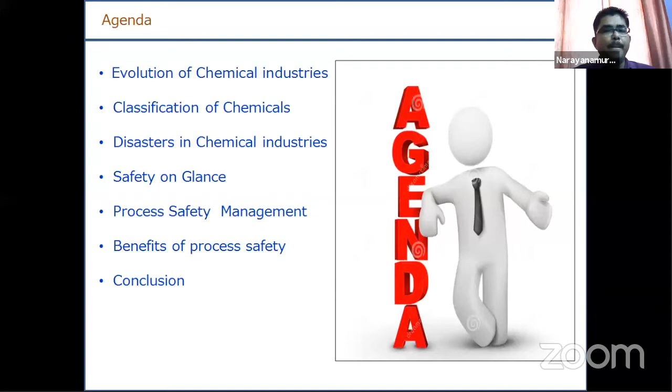So the evolution of chemical industry starts somewhere way behind 5000 BC, where the invention of fire played a very important role. Clay was used for making of utensils. In 3000 BC, Egyptian tombs were covered with soda ash, and we were able to ferment vinegars from grapes. In 1600 AD, inorganic chemicals were invented to preserve meat, and gunpowder was used in local artillery and warfare, and soap invention played a major role in 1600 AD.

In 1700 AD, 14 elements were identified. In 1800 AD, 100 elements were identified. 1850 to 1900 saw the evolution of organic chemicals and radioactivity, which played a very important role in generation of electricity as well as in warfare. In 1930, a new revolution started for the Second World War, where plastics and petroleum refining played a very important role. That also started the evolution of the polymer industry throughout the world.

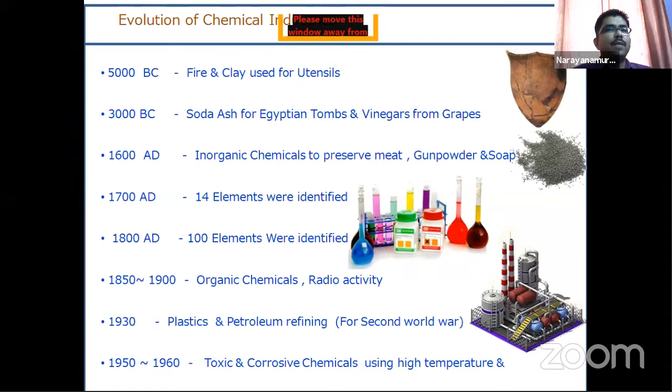In 1950 to 1960, various toxic and corrosive chemicals were invented using high temperatures and reactors. Thus started the industrial revolution throughout the world. So this is the basic evolution of how the chemical industry evolved from 5000 BC.

Based on the various reactivity of the chemicals, we have chemicals classified. 13 types of chemicals are classified based on the hazardous components. The first is flammables. Flammables are again classified into 3 types: class A, class B, class C, based on the flash points. Second is explosives, which are either air reactive or water reactive, or they are explosive because of the composition of various chemicals. Corrosives, based on pH, are acids and bases.

Toxics are basically those which create danger to environment and to humans based on exposure. Oxidizers are basically chemicals which react with oxygen and give out various toxic components. And we have compressed gases. Compressed gases are stored mainly in cylinders or in bullets. Next is cryogens, next is air reactive, and next is water reactive.

On the right hand side, you can see the various symbols of various chemicals. The square shape which is red indicates it is usually a danger. As we see in traffic signals, red means you stop. The same thing applies to chemicals, where the flammable symbol inside the red square indicates it is actually flammable. Oxidizing means you have the O symbol over which there is a flame. Explosive means it is like a cracker, so it's explosive.

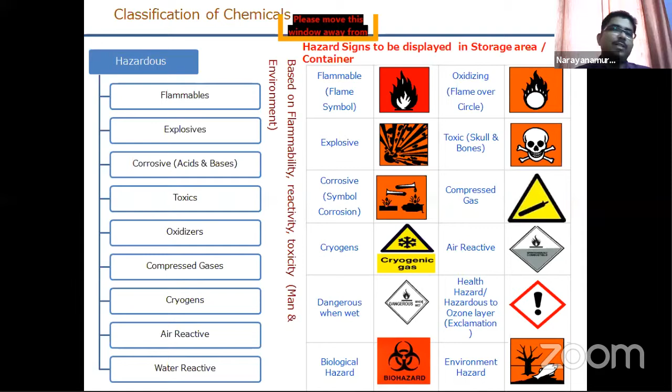As per government rules, the classification of chemicals needs to be displayed on the can, the bag or the container where it is stored. Environmental hazard is shown by a fish coming out of water. So these are the various classifications of chemicals in the world. Based on the reactivity, the chemical composition, and the constituents of the chemical, they are further classified into various elements.

So these have been the major chemical disasters throughout the world. It is a BASF explosion. BASF is a factory which manufactures various chemicals for fertilizers as well as for artillery. It happened in September 1921, where 4,500 tons of ammonium nitrate and ammonium sulfate exploded.

In theory, in 1919, there was a common saying that both the ammonium nitrate and sulfate concentrations had to be maintained at 50-50% to make sure that the reactivity does not explode. But the concentration of ammonium nitrate exceeded 60%, which resulted in a major explosion. Almost 80% of homes were destroyed over a radius of 25 kilometers. This was the major industry before World War I.

In 1947, when there was a boom in the petroleum industry and in the fertilizer industry, there was an explosion on a French ship. During the unloading of ammonium nitrate, people started using iron tools instead of non-flammable tools, which resulted in the explosion of ammonium nitrate. At that time, fire extinguishing was not well known. The captain used steam to extinguish the fire. The fire got aggravated; 3,500 people were injured and 576 people were killed. This resulted in the implementation of safety measures in dockyards.

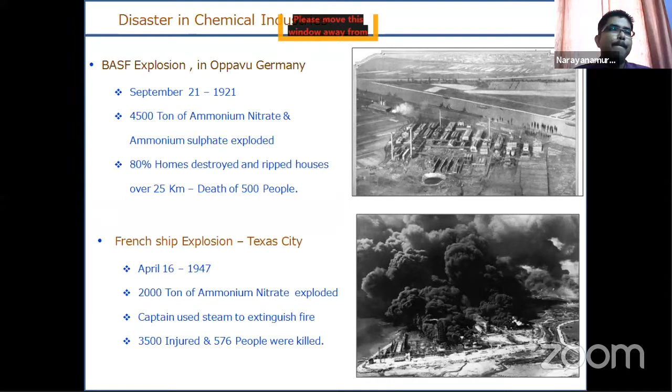As you all know, the gas leak. India was at the fertilizer revolution, the agriculture revolution. We needed to manufacture a lot of fertilizers to meet the demand of the food industry in India. Manure was being produced in Bhopal, and 42 tons of methyl isocyanate was released, which resulted in 18,000 people dead and over 5 lakh people affected. Till now, there is a case going on to give remedy to the people.

The gas leak in Bhopal created a major change in the government, and after this, the occupier was held responsible. The occupier is accountable for any hazardous leak in India. Before that, for any hazardous leaks or accidents, the occupier could not be held legally responsible in law. After the gas leak in Bhopal, a special clause, 41D, was introduced in the Factories Act to make sure that the occupier is held responsible for gas leaks and any hazardous occurrences.

This was a major one in Seveso, Italy. The toxic cloud release of tetrachlorodibenzodioxin, a very dangerous chemical. People didn't know about the use of this chemical. The reactor overheated and burst. The toxic cloud was released, and till now this land has become uncultivable. 1,800 hectares of land became uncultivable. Till now, people have isolated the area.

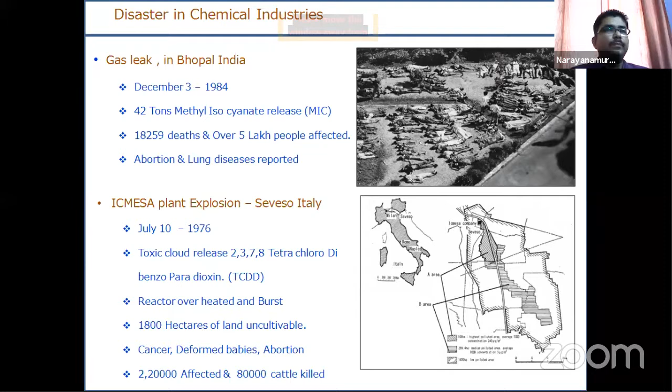This is March 23, 2005, where there was a hydrocarbon vapor explosion in the British Petroleum BP Texas City refinery. Almost 15 deaths were reported. British Petroleum is basically a UK company, and it was forced to sell to the US for $2.5 billion. It is actually 1/10 of the profit of the company. They sold it for a meager amount.

This is a major one. China was competing in the world to become a superpower, so all major chemical industries were opened in China. They wanted to compete with the USSR and the US, so they started petroleum refining. At that time this incident happened in Jilin Petrochemical Corporation. Jilin is a major producer of both petrol and diesel supplied to China.

The nitrobenzene rectification tower exploded. 100 tons of benzene and nitrobenzene flowed into the Songhua River. The Songhua River is the water source for almost 5 provinces in China. The water pollution results in blood cancer, and 1 lakh people were evacuated from this place. Till now, this place is not being used because of the fear of chemical pollution.

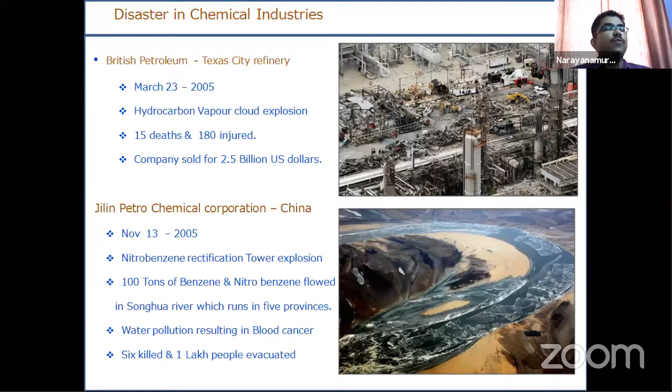And as you all know, at LG Polymers in 2020, the toxic release of styrene happened. 2,800 tons of styrene was released into the atmosphere. 13 deaths and 1,000 people were affected. The company was closed temporarily.

What is the cause? The temperature. Styrene was stored in a storage tank, and 22 degrees was to be maintained in the tank. Due to COVID lockdown... we need to prevent the polymerization of styrene. So tertiary butyl catechol needs to be added to the tank to stop the polymerization of the styrene, but that was not added. Due to the lockdown, as it was summer in Visakhapatnam, the temperature was not maintained.

The chiller plant was switched off for almost 24 to 48 hours to reduce power consumption in the plant. So slowly, the vapor in the tank started expanding, and an emergency procedure was not available.

The plant was started in 1998. At that time, population was not allowed in the 14-kilometer range. But as the population slowly increased, people started moving towards the company. Municipal authorities also gave permission for people to locate their homes near the factories within a 3-kilometer radius.

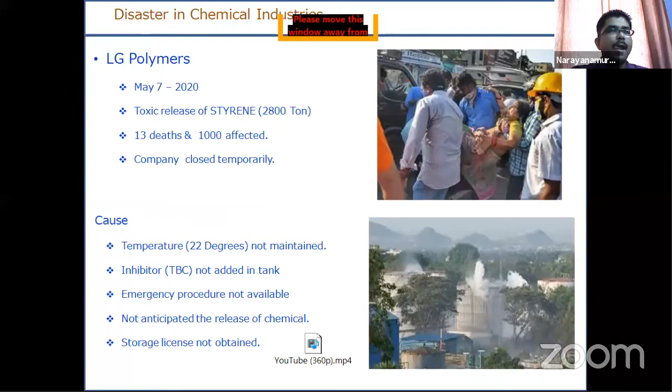What is the near miss? The near miss is nothing but when there is no injury occurring, no illness or fatality occurs. It is called a near miss. The incident may occur, but there is no injury, illness, or fatality. So that is usually called a near miss. Then you need to write it down.

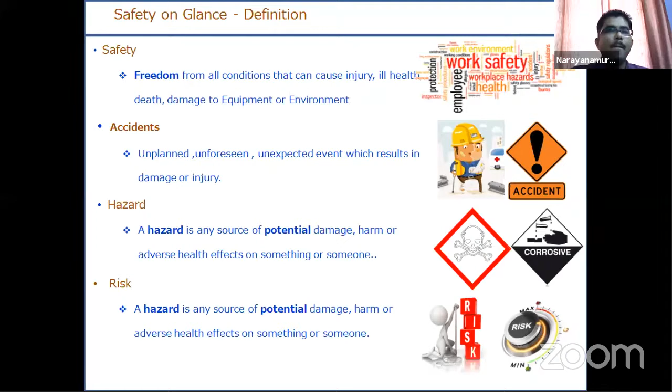So an unsafe condition can be a slippery road, can be steps without a handrail, can be a workplace environment where there is a physical condition which is causing an injury. Unsafe acts, I will come to on the next slide. An unsafe act is any act that deviates from safety procedure, behavioral issues, unauthorized work, etc.

As you see in the diagram here, there is a load attached to the hook of the crane. The chain link is cut. Okay, it is an unsafe condition. You have got two people working under a suspended load. No people should walk under a suspended load. We have got two people who are not aware of the load on top of them, so they are walking under the load. It is an unsafe act.

This is a near miss. The link is getting cut. The load is falling in front of them, but the people are not getting affected. This is an example of a near miss. Suppose the load falls on a person, there is an accident. Now you can understand the difference between an unsafe condition, an unsafe act, a near miss and an accident. The simple diagram shows you the four different aspects of an accident.

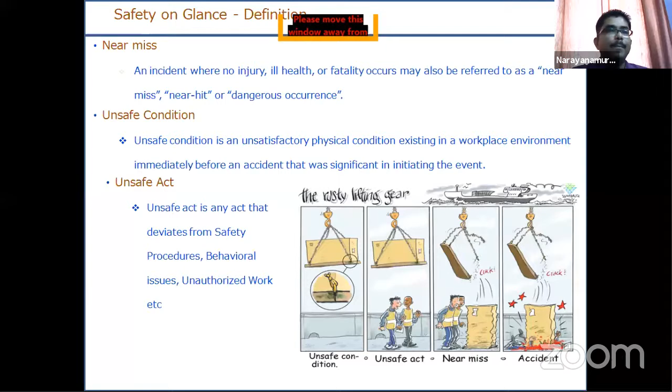So Heinrich is actually a safety scientist. To be frank, he has written various theories on safety, but I am going to give only a synopsis of what he has told. It is actually a 500-page book where he has told about various human behaviors, constitutive factors, and the physical environment which plays a very important role that affects human safety, which in turn affects the safety of the environment, health and society as such.

But according to the synopsis of his theory, 92% of accidents are mainly due to the unsafe acts of people. That is, it may be a person or a group of people. According to him, if 100 accidents happen throughout the world, 92% are due to the unsafe acts of human beings. 6% of accidents are due to unsafe conditions. Unsafe conditions may be a slippery floor, a damaged road, a damaged tunnel, a hanging wire, everything.

2% of accidents are due to natural disasters. Now, natural disasters are divided into two types: man-made and nature-made. We don't want to go into the political and economic aspects of natural disasters. There are various natural disasters happening throughout the world. People do it and they put the fault on nature. Okay. So, according to Heinrich's theory, 92% of accidents are mainly due to the unsafe acts of people.

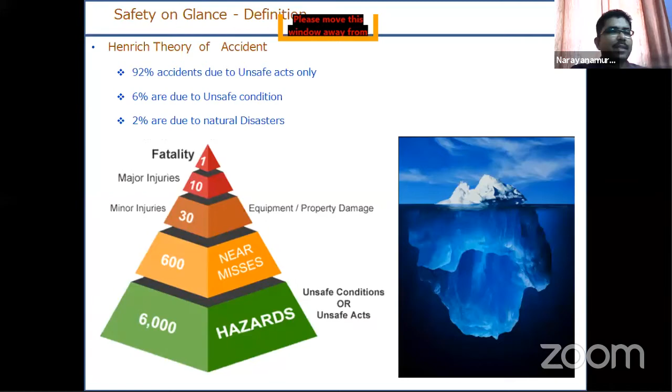So, why we have got the various hazards and various near misses, and why we need this process safety management. The process safety management mainly deals with four aspects called plan, do, check, act. Anywhere you go, process safety management concentrates only on four aspects, that is plan, do, check, act. The plan is basically based on assess and define what are the various hazards in the workplace. Then we have to design, implement and construct the controls over it. Then we have to monitor the process.

In the case of LG Polymers, they had an assess and define problem, that is, the styrene needs to be maintained at 22 degrees centigrade. They had implemented the refrigeration system inside the plant to make sure that the styrene is maintained at 22 degrees centigrade. But the operational maintenance of the plant was faulty. That is, the cooling system was switched off, so the styrene temperature could not be maintained at 22 degrees centigrade, which resulted in the death of 13 people and affected 1000 people.

So, process safety management is a continuous process. You have to maintain the process. Suppose you see any flaw in the process or any improvement in the process or any change in the process, we need to again assess and define the process. Then we need to implement controls. Then we need to monitor the same. And then this process goes on like a cycle. So this process needs to be done in each and every stage of the process safety management. I am giving you just the outline. Based on this outline, you can develop; I will give you examples of how the process goes.

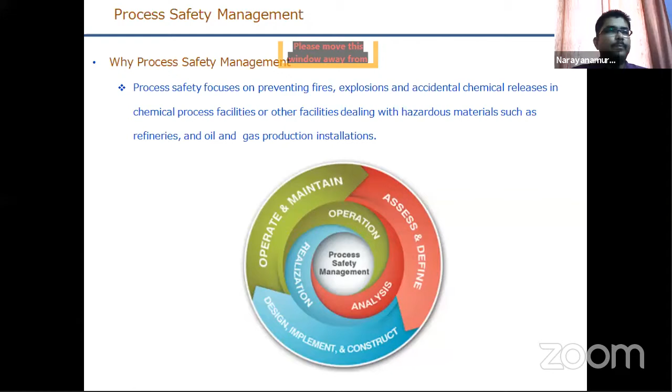So in the process safety management, we need the following information. Without this information, we can't proceed with the process safety management. What is the process safety management content? Process safety information. For this process safety information, we need the PSI diagram and MSDS. MSDS is nothing but the material safety data sheet of each and every chemical involved in the process. Then we need a process hazard analysis, it's called HAZOP. It's a beautiful study. It is being implemented in various petrochemical and any chemical industry should follow this HAZOP system to make sure that the process is safe. I will explain an outline of the HAZOP process in the coming slides.

Then we need to know about the standard operating procedures. These two stages come under planning. This stage comes under do. Then we need to train the people to follow the safety procedures. Okay. Then we need to have the permit to work system for the various processes and various activities involved in the process management. Then we need to have the emergency response system.

In the case of styrene leakage, I will talk about the present scenario. The company did not conduct. We need to have an on-site emergency and off-site emergency plan in case of toxic release. On-site emergency talks about any hazard or any fire or any explosion or any toxic release occurring inside the plant. Off-site emergency is outside the plant. If any toxic release happens, how the person is going to get affected, how you are going to evacuate the whole people, what is the first aid method you are going to give, where is the nearest hospital available, what is the mode of transportation to reach the people, whether the hospital has got adequate antidote to cure the toxic release. All these need to be covered under the off-site emergency plan.

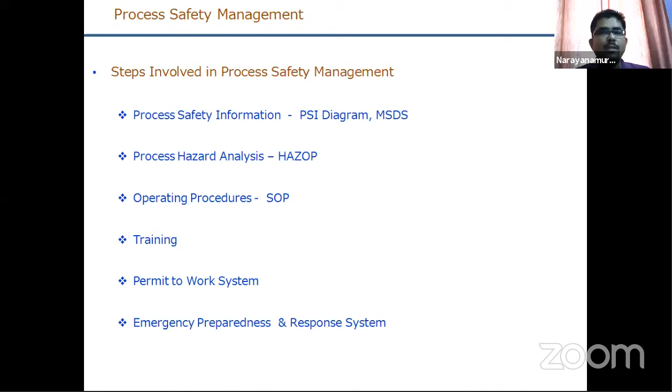You need to conduct a mock drill. Mock drill is a simple process where you do a scenario of a leak and how you are going to evacuate people to a safer location. Any loss can be compensated, but human loss cannot be compensated. It can never be replaced.

So the process safety management usually details the various hazards available in the process. I will show you an example in the coming slides. So what are all the various details required in case of process safety? First, we should know about the material safety data sheets of the various chemicals used in the process. This is mandatory. Styrene: I should know what the composition of styrene is. I will come to the material safety data sheets, what all should be there in them.

Next we should have the process flow block diagram. Next we should understand the process chemistry. What is the temperature to be maintained? What is the pressure to be maintained? What are the reactor parameters to be maintained? What is the maximum inventory of chemical I need to store? Because in case of a lockdown or a shutdown, we need not store so many chemicals inside our plant.

As the COVID lockdown was unprecedented, they stored almost 4,800 tons of styrene, which is highly flammable, out of which 2,800 got released into the atmosphere. So how much inventory I need to maintain for my production capacity also needs to be meticulously calculated. What are the safe upper and lower limits of temperature, flow control, pressure, and reactor conditions?

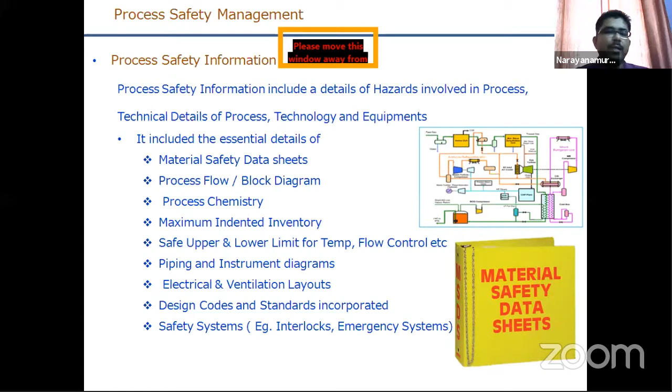Okay. Next, the material safety data sheet is very, very important. For every chemical, we need to have the 16 parameters. Without the 16 parameters, the material safety data sheet does not comply. So if you are purchasing a chemical from a supplier or anybody, we need to have the 16 parameters, and we should understand the significance of each. Only then can we decide the process parameters, the emergency response team, and the various emergency requirements of the plant.

So first is, who is the supplier, and the emergency contact number. What is the composition of chemicals? Then what is the hazard identification? What are the first aid measures to be taken in case of a toxic leak? With this I need to educate the people working inside the plant and also those outside the plant. Then what firefighting measures are required in case of any fire?

What are the handling and storage precautions? How should I store the chemical? What conditions are to be maintained? How much volume should I store? What is the requirement of the tank, of the chemical composition, of temperature, of pressure in the tank? All these things need to be available. What PPE is to be used? What are the physical and chemical properties?

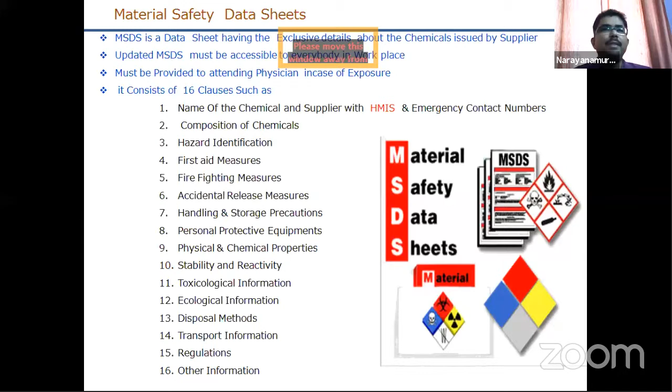So this is the hazardous material identification system. For all chemicals, there is an international standard which says that the fire hazard is usually denoted by this symbol with the red shading. The health hazard is purple or blue in color. If you need to specify any other hazard, in the others column we have got acid, alkali, corrosive, oxidizer, radioactive, no water. Then reactivity: may detonate, shock or heat may detonate, violent chemical change, unstable if heated, stable.

So if a chemical is labeled as 1, this is 4, this purple or blue, and this is acid. So I should presume that the flash point of the chemical is below 73 degrees Fahrenheit. Reactivity is unstable when heated. Health hazard is hazardous, so it will not cause any death during exposure.

Next is acid. So we need to understand, in the HMIS symbol, hazardous material identification symbol, if the number is more, then the chemical hazard is more. Simple. So before procurement of any chemical, you should know the various numbers. One is the health hazard, second is the fire hazard, third is any other specific hazard, fourth is the reactivity. These 4 must be known and must be labeled in this symbol on any chemical. That's what the rule says. But in India, almost 60% of the companies don't follow this rule, and we need to improve on this.

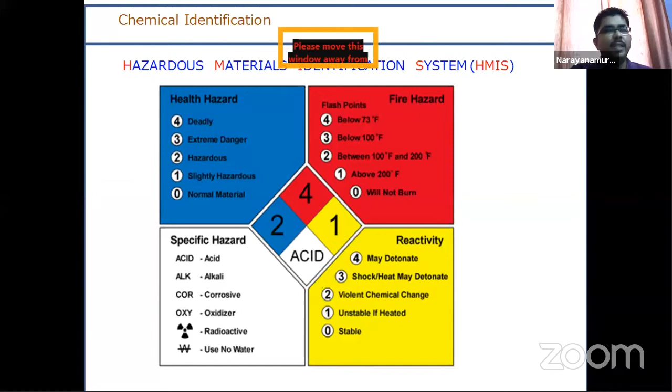So these are the various definitions which are given in the material safety data sheet. The material safety data sheet does not explain all this. It just mentions what TLV should be maintained, what PEL should be maintained, what is LD50. The material safety data sheet gives the various information regarding the various chemicals.

Then flammable. So for flammable, we have got three classes A, B, and C. Flammable is easily ignited below the flash point of 95 degrees Fahrenheit. The flash point is the lowest temperature at which a liquid produces vapor to ignite. For example, petrol is left in the open atmosphere. Petrol slowly evaporates. So for fire we need oxygen, heat as well as fuel. Fuel is available, heat is already available in the atmosphere. So petrol searches for a source for igniting.

So during this, suppose it finds any other source. For example, there is a matchstick nearby. There is a loose electrical connection nearby. There is a storage of hazardous chemicals that is not grounded properly. So through that fire may occur. So we should know at what temperature the liquid vaporizes in order to ignite.

So toxic is mainly substances able to cause harm on exposure. Exposure can be due to inhalation through the nose, and one is through the mouth, where toxic intake can happen, and one is through the skin. So these are the three possible ways a person can be exposed. So as you know, coronavirus is toxic to human beings. So what are you doing? You are covering your nose and mouth with a mask.

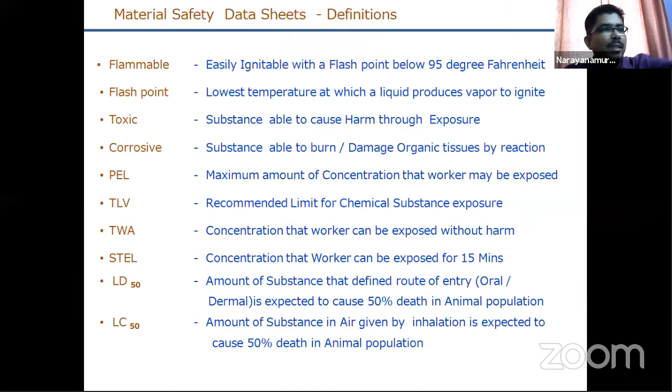So LD50 and LC50 are mainly meant for exposure in case of any environmental hazard. That is mentioned in the MSDS. So we have to make sure that LC50 and LD50 are within the limits of chemical exposure. So these are the various terms used in the material safety data sheet. Based on the material safety data sheet, we need to design the process.

So this is a process hazard analysis, where it mainly describes, as you said, plan-do-check-act. We should identify the various hazards involved in the process, and we should implement the various control methods to control the process. And the PHA analyzes the consequences of fires, explosions, and release of toxic materials, and it also determines the various failure modes where the environment or people can be affected or fire can happen. So the failure mode needs to be analyzed with an engineering control.

So the PHA team should always include engineers, operators, supervisors, and workers who have got direct experience, and they should have knowledge of codes and specifications of various chemicals and the various piping and instrumentation being used in the plant.

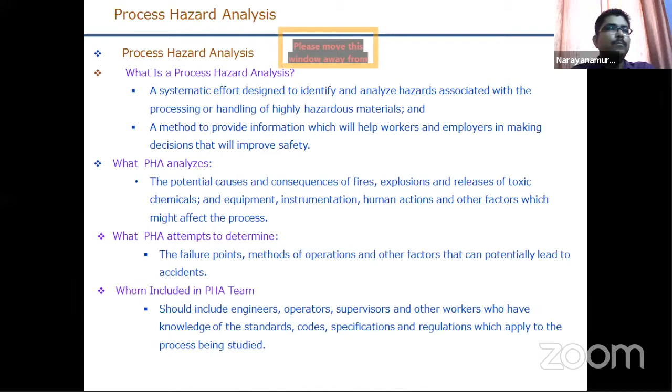See, there are various methods to do a process hazard analysis. One is a checklist. A checklist is nothing but a sheet which contains what all is to be seen in a process. Here is an example of a simple checklist. For example, before cooking, what are the things we need to maintain? That is a checklist. I need to keep the gas ready in good condition. I need to turn on the knob. I need to switch on the lighter. I need to keep the pan ready, the oil ready, the vegetables ready. So there is a checklist.

So based on the process or the requirement, we tick whatever is defined in the checklist. There can be a chance of failing the checklist because the checklist mainly depends on the experience of the person, not on the experience of the process. So there is also another method called the what-if method. What-if mainly concentrates on the end product, basically.

Suppose: what if I don't switch on the gas burner? What if I don't switch on the lighter? What if I don't keep the pan ready? What if I don't keep the material ready? So what will happen if we don't keep all the process parameters in ready condition? What are the various failures which can happen due to this condition? So all these things come under the what-if method.

The what-if method is mainly used in accident investigation or in problem-solving techniques, not in hazard analysis and process safety management. So HAZOP is called hazard and operability study. HAZOP study plays a very important role in process safety management. The HAZOP study is done in various process industries. It is actually a session of one week. I am only giving a glimpse of what is there in the process safety HAZOP study analysis. The simple requirements of HAZOP, I will let you know.

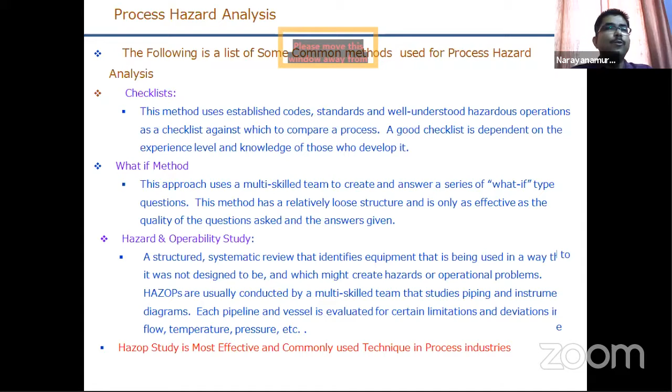Okay. So there should be a team from the top management, and the requirements of a hazard and operability study are: one, you should have the block flow diagram. I will show you what the block flow diagram is. Then you should have the process flow diagram. The process flow diagram is required for any HAZOP study. And next is the P&ID, piping and instrumentation diagram.

And next is the various codes and standards. Codes may be a regulatory requirement; standards and specifications are recommended practices for construction, fabrication, manufacturing, and inspection. So all these things, construction, fabrication, manufacturing, and inspection, need to be implemented during this HAZOP stage.

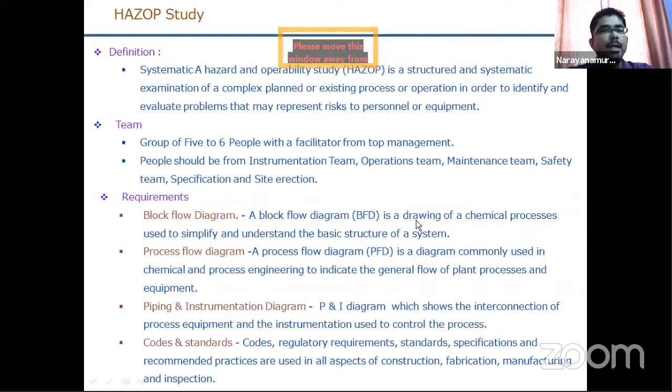Okay, a block flow diagram. I'll just show you the basic structure of a system. This is a block flow diagram. This is an example of an effluent treatment plant. So this is a block flow diagram. It is the effluent treatment process of a treatment plant, actually.

Sir, can I continue? Sir, continue, sir. So some people have raised hands, that's what I'm saying.

Okay, this block flow diagram mainly concerns the various process flows. It indicates the various stages the effluent water runs through in sequence. For example, effluent water passes through the screening process, the equalization process, the coagulation process, the flocculation process, and the tube settler. The bottom of the tube settler goes to the pit.

Then it goes to biological reactor 1, then biological reactor 2, then the tube settler, then the collector tank. From the tube settler bottom it again goes to the pit. From the pit, overflow goes to a clarifier and then to the dewatering plant. From the collector tank it goes to ACF, activated carbon filtration, then to sand filtration, and then the water comes out. There are two stages in the whole process.

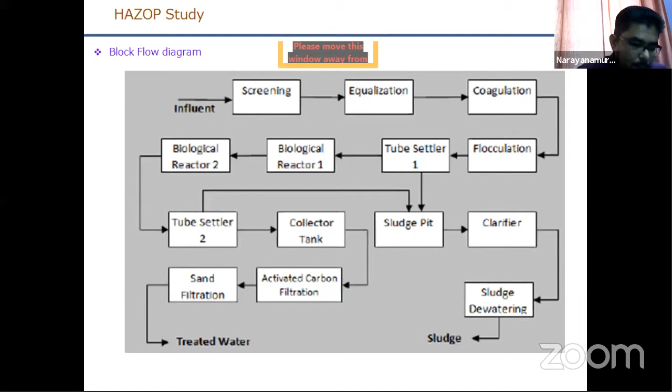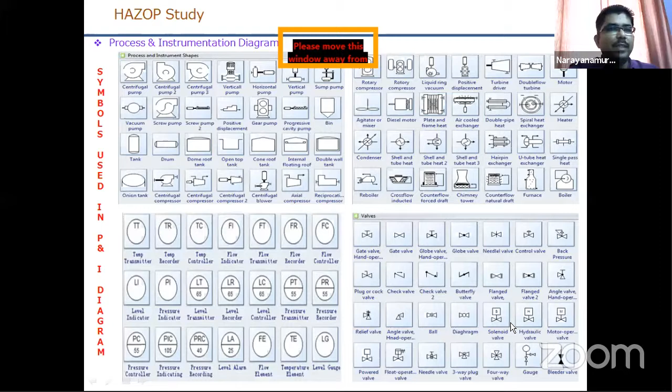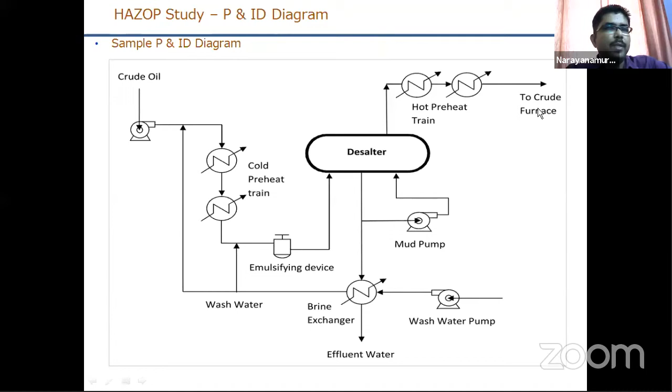I will explain with a simple example how to do hazard analysis. This is the reaction tank where we produce a product called C. We require two raw materials: material A and material B. It's a simple reaction, A plus B equals C.

The process requirement is that component B must not exceed component A, to avoid explosion. Component A should always be on the higher side; the quantity of A should be more than B to avoid explosion. This is the simple process requirement.

So what does the process hazard analysis say? What should a chemical engineer do? He should consider the various ways A can fail to maintain minimal flow, the conditions that may cause failure of the minimal flow of A. If B exceeds A, it may result in explosion. So what are the various causes which inhibit the flow of A?

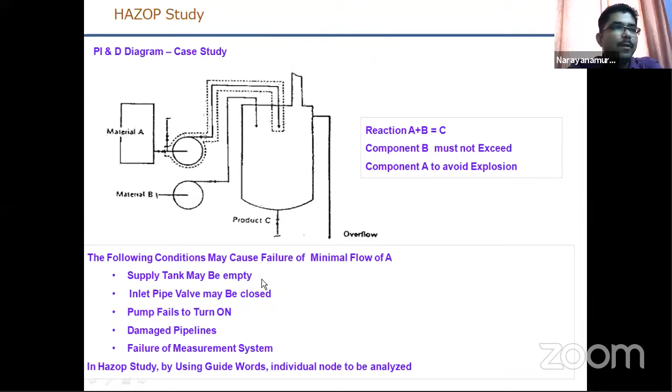So what we do, I follow a check sheet. So these are the various guide words used in the HAZOP check sheet. These are the various parameters. One is flow, one is pressure, one is temperature, one is level, one is time, one is agitation, one is reaction, one is startup shutdown, one is draining and venting. So these are the various guide words which are used in the process.

And each guide word should be followed by what happens if the flow is more, what happens if the flow is less, what happens when there is no flow, what happens when there is a reverse flow from the reactor, what happens when more flow occurs, that is as well as when both the components react together, I produce a component C. What happens when there is a deviation in concentration?

What happens when the concentration exceeds? What is the other byproduct produced? What is the contamination produced? What is the other component produced if there is any deviation in the process? So all these guide words are done for each and every line, each and every parameter. Suppose in this previous case, only flow is the guide word. So I have to apply this flow in all these 5 cases.

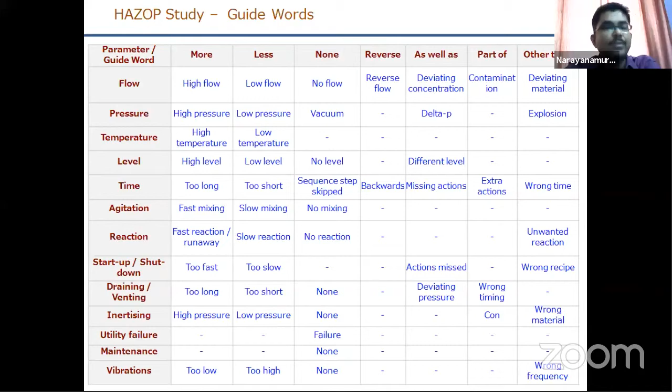Then I need to put it in a sheet. Guide word: what will happen with more? If there is more flow of A, what is the cause of this deviation? What will happen if the flow is less? What are the consequences? What is the hazard? So how do I implement this control measure?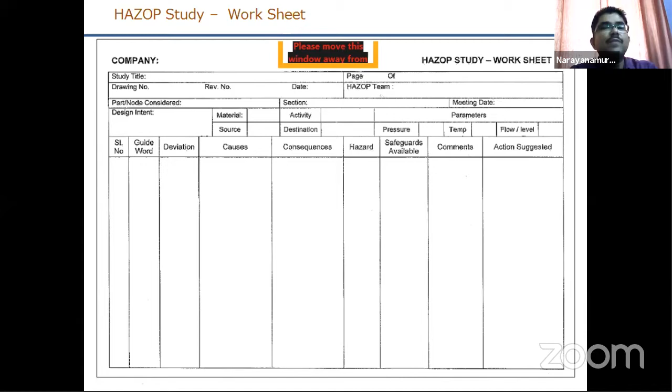So this is planning, doing, checking, and acting based on this. This simple sheet should be done for each and every line, each and every process. This is an example of a HAZOP study worksheet.

So as I told you, the emergency response was, to be frank, very poor in case of the styrene leak and other chemical disasters actually. An emergency is nothing but an unexpected dangerous situation which requires immediate action. I don't expect the styrene to get leaked in the atmosphere, but I need to mitigate it immediately. So types of emergency can be anything. It can be natural calamities, it can be man-made, it can be fire.

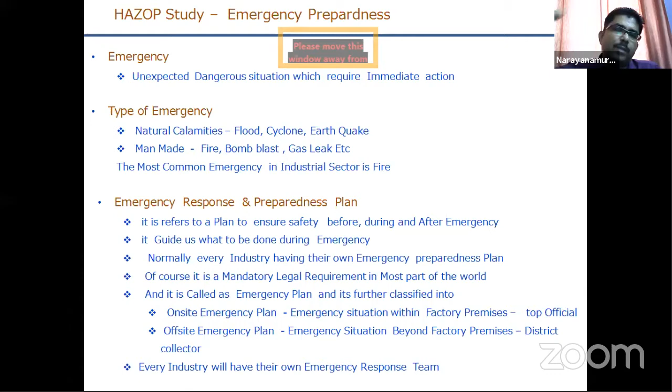The emergency response team needs to be developed. As I told you, emergency response is basically first protecting the workers who are working inside the plant and protecting the environment, people, society who are present outside the plant. So every industry should have an emergency response team.

So this is a simple layout of an ERT, emergency response team structure, where you have the emergency controller. Then we have isolation, technical support, firefighting, medical, evacuation, communication, administration. So these need to be done both on-site as well as off-site. On-site is inside the company, off-site is outside the company.

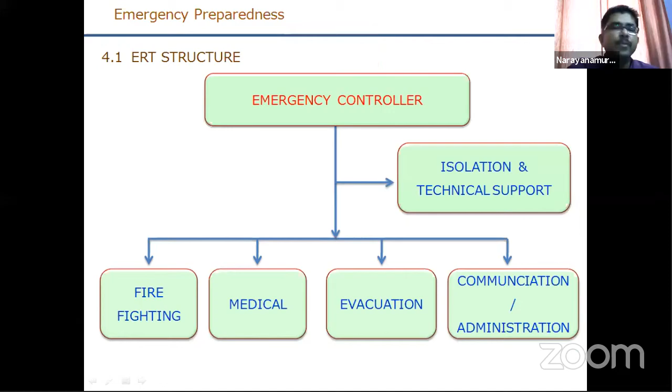Before going in, I want to put here a simple video of how a human error can lead to a major accident.

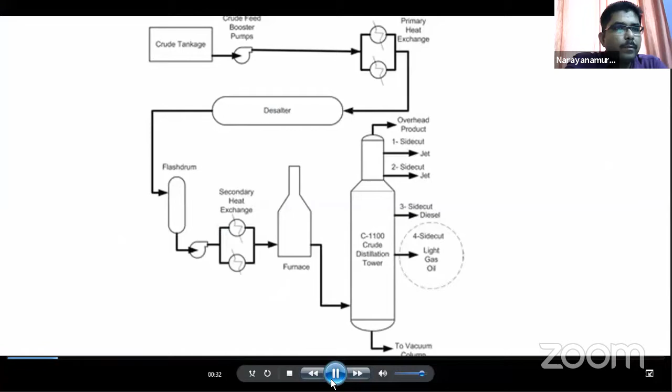The Chevron refinery lies approximately 10 miles northeast of San Francisco in California's Contra Costa County. The 2,900-acre facility was initially established in 1902 and primarily makes transportation fuels, such as gasoline and diesel, as well as lube oils. The refinery can process up to 240,000 barrels of crude oil per day. The first step of the refining process takes place in the crude unit, where crude oil is cleaned and heated before entering the distillation tower.

It is basically a manufacturing plant which processes crude oil. The crude oil is heated and it is sent to the distillation chamber.

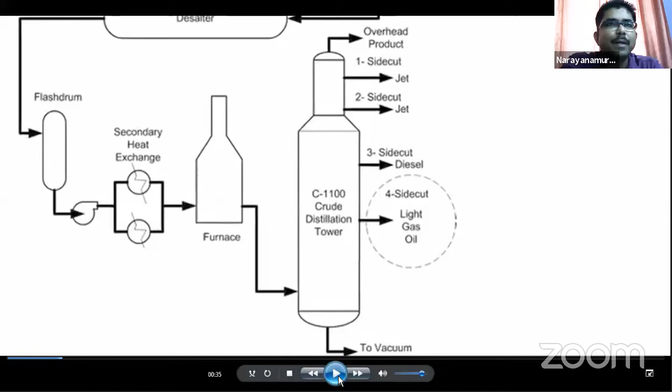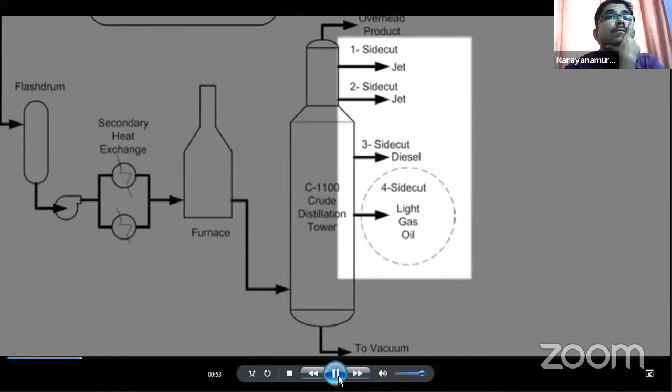Inside the tower, the crude oil is boiled. The vapor then condenses into various liquid hydrocarbon fractions, or streams, including jet fuel, diesel, and gas oil. The different streams exit the distillation tower through separate pipes or side cuts that lead to other sections of the refinery. On August 6, 2012, the crude unit was operating normally.

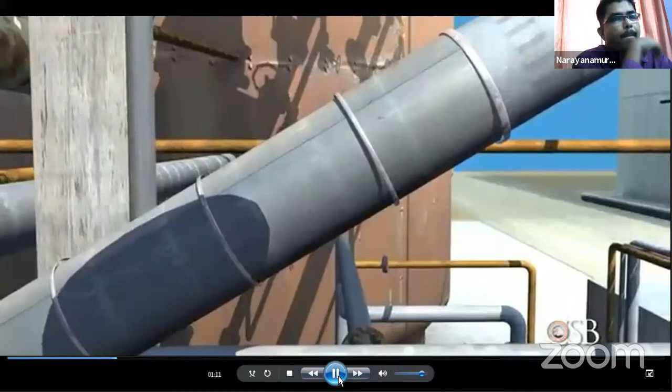Around 3:50 that afternoon, an operator was performing a routine check when he noticed a small puddle on the ground near the distillation tower. The liquid appeared to be dripping from an 8-inch insulated pipe 14 feet overhead. The leaking pipe was a section of the tower's number 4 side cut line, which operated at a temperature of 640 degrees Fahrenheit and contained light gas oil, a combustible liquid similar to diesel fuel.

Chevron inspectors knew that over the years, the walls of the number 4 side cut had thinned due to corrosion. They did not realize how close this particular segment was to failure. There was no shutoff valve between the pipe and the distillation tower, and no way to isolate the leak.

The head operator was called to the scene. Although he believed the situation was serious, he did not believe the small leak warranted immediately shutting down the unit and stopping production. Following Chevron's standard practice for responding to hazardous leaks, refinery firefighters were sent to the scene. A number of managers, engineers, and technicians gathered there informally to assess the problem.

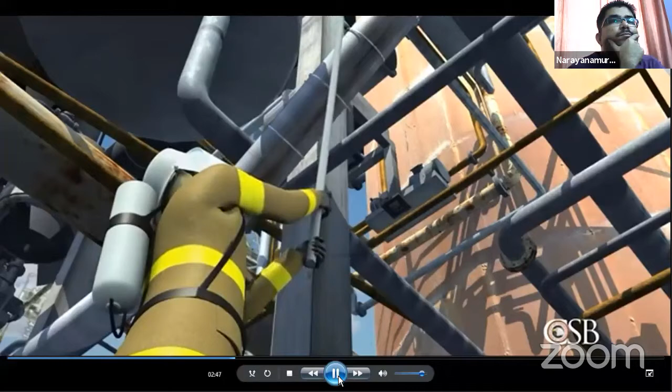The group discussed a recommendation from an operator to shut down the unit, but they decided to first try to pinpoint the leak by removing insulation from the pipe while the crude unit was still running. They hoped they could stop the leak with a temporary metal fitting known as a clamp. A Chevron firefighter tried using a pike pole to hook and pull away the insulation, but this poking action was deemed too dangerous. The CSB later found that the tip of the pole likely caused a small puncture in the already thin pipe.

As the unit continued to operate, workers assembled scaffolding directly beneath the leaking pipe. Two firefighters then used a hook to remove the insulation from the pipe. As they were working, hydrocarbon vapor began to flow out from underneath the insulation. Two firefighters backed away from the growing vapor cloud. As the hot vapor mixed with air, it ignited. That fire was quickly put out, and the two firefighters immediately climbed down off the scaffolding.

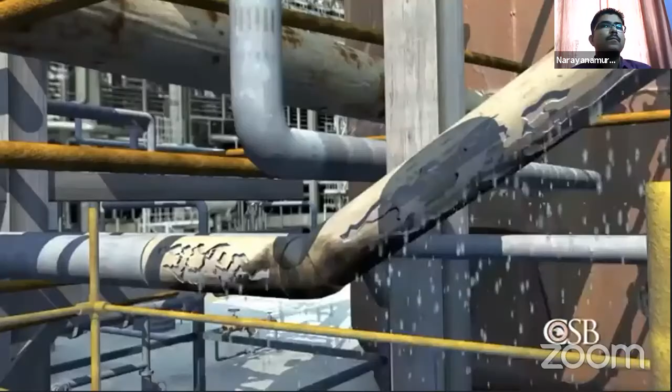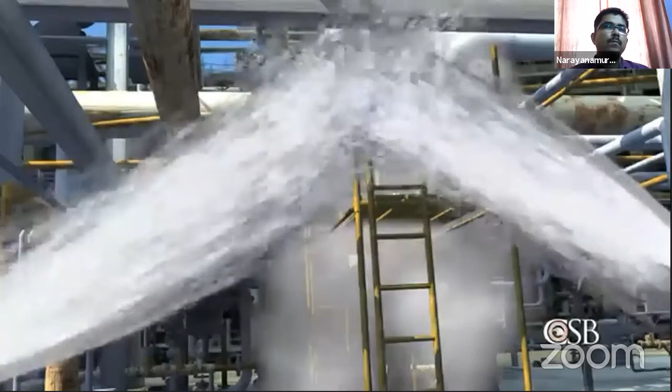But the exact location of the leak was still obscured by the remaining insulation and firefighting water. So the Chevron firefighters attempted to strip the insulation off the pipe with high-pressure water. But the leak suddenly worsened, and hot hydrocarbon liquid started to spray out of the pipe. A decision was finally made to begin an emergency shutdown of the crude unit. But it was too late.

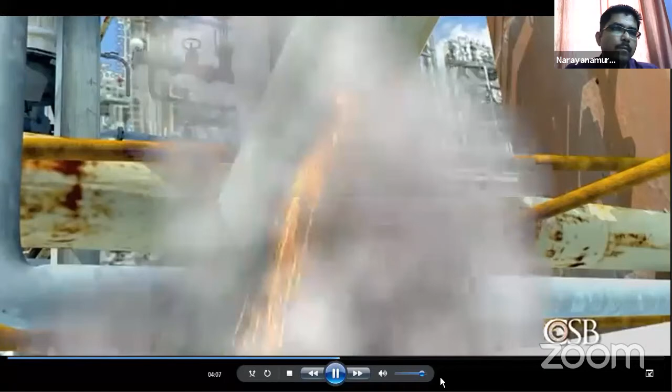Suddenly, the pipe ripped open. A vapor cloud formed and rapidly expanded as the large inventory of hydrocarbons in the distillation tower started to vent through the ruptured pipe. The vapor cloud immediately spread over hundreds of feet, engulfing all 19 people who had gathered nearby. The firefighters and operators struggled to escape through the dense hydrocarbon cloud, unable to see. They had to feel their way out, some on their hands and knees.

At approximately 6:30 p.m., 2 minutes after the huge vapor cloud formed, hydrocarbons ignited. One firefighter was trapped inside a fire engine when it was suddenly engulfed in flames. He radioed for help.

But when he received no response, he assumed everyone else was dead. To escape the inferno, he fled through what witnesses described as a wall of fire. Fortunately, all the workers would eventually flee to safety. There were no fatalities.

The towering white vapor cloud could be seen as far away as San Francisco on the unusually clear August day. After the ignition, a dense plume of black smoke formed and drifted away from the refinery. The fire continued burning for hours. Over the succeeding days, more than 15,000 people sought medical treatment at nearby hospitals for breathing problems and other symptoms.

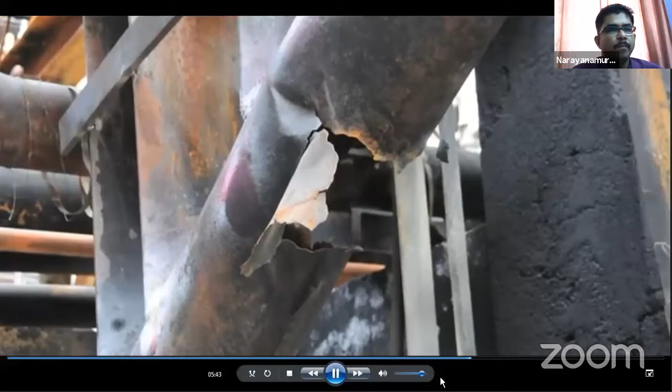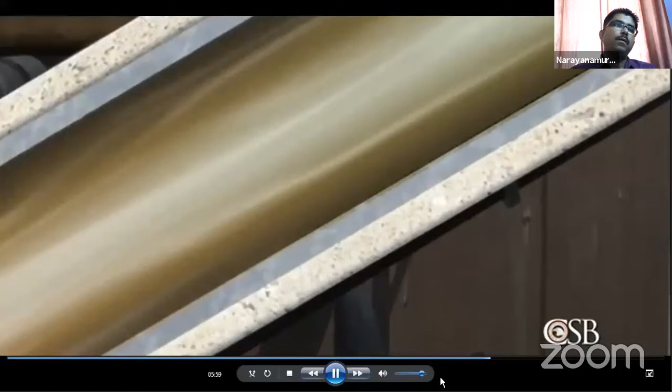During its investigation, the CSB determined that the carbon steel pipe installed in 1976 had thinned to the point of failure from an effect known as sulfidation corrosion. Carbon steel piping is particularly susceptible to this type of corrosion, which occurs over time when the steel is exposed to sulfur-containing hydrocarbons at high temperatures. Steel piping that happens to be low in the element silicon corrodes especially quickly.

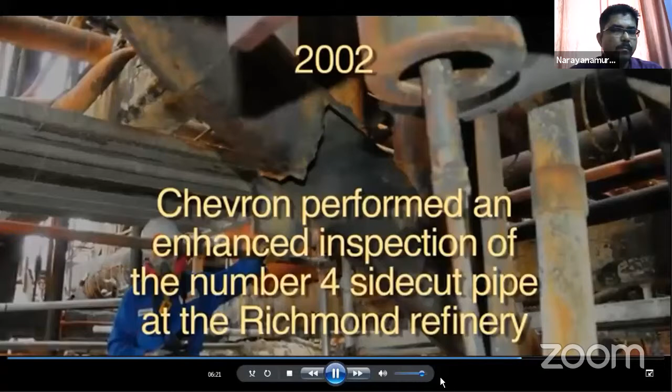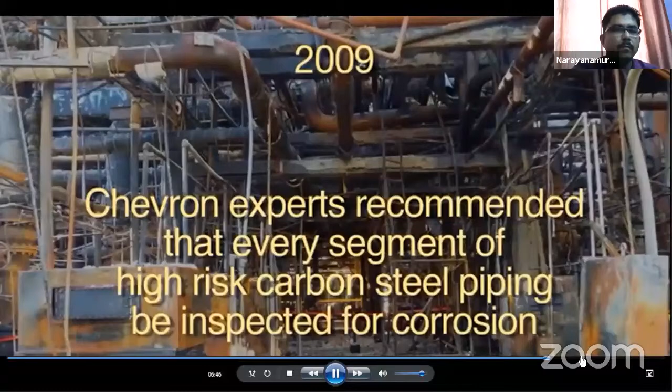The CSB learned that sulfidation corrosion had caused a major failure at Chevron's refinery in Salt Lake City, Utah, in 2002. Chevron then performed an enhanced inspection of the number 4 side-cut pipe at the Richmond refinery. It revealed accelerated thinning in the piping section that would ultimately fail in 2012. Replacement was recommended, but this did not occur, and the section of piping was never inspected again. In 2009, Chevron experts recommended that every segment of high-risk carbon steel piping be inspected for corrosion. However, this was not done.

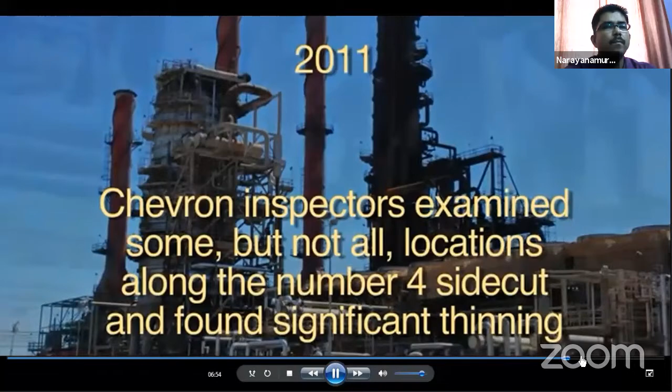During a maintenance turnaround of the crude unit in 2011, Chevron inspectors examined some, but not all, locations along the number 4 side cut and found significant thinning. Some sections were replaced, but managers decided that the line was thick enough to stay in service, and an overall replacement could wait up to 5 more years.

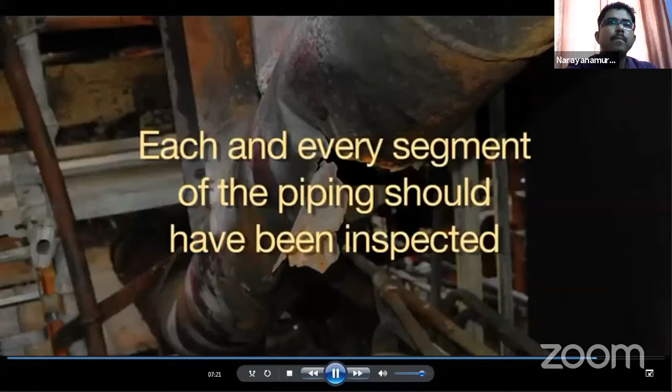According to CSB investigators, a key lesson is that each and every segment of the piping should have been inspected. Most importantly, the pipe should have been replaced much earlier with an inherently safer corrosion-resistant alloy. The CSB also concluded that had the crude unit been shut down when the leak was first noticed, the massive fire likely would not have occurred. The night

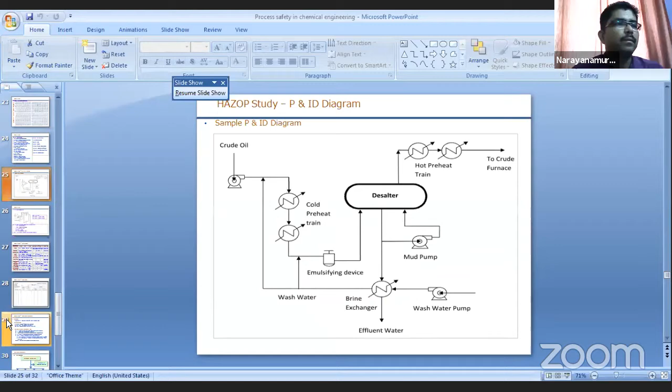Corrosion in the pipeline, the plant needs to shut down. But other people convinced him saying that it can be corrected. If the plant would have been shut down for at least half an hour, they would have replaced the pipeline and the plant would have started again. The decision of a person to run the line created this big havoc, but with all the experience, they were able to escape the fire. No casualties are reported in the fire.

This is an example where I told you plan, do, check, act. Planning is being done to replace the pipeline, but the do is not happening and the check is not being done. Sir, over to you, sir.